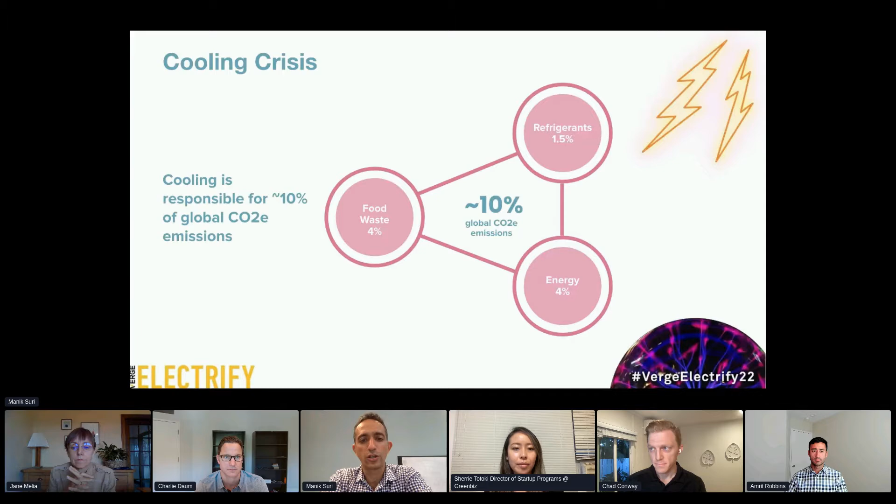We see a huge cooling crisis. Right now, refrigeration and air conditioning, the cooling sector, are responsible for nearly 10% of all warming when you think about the impact that refrigerant leaks, energy consumption, and product spoilage at scale have on the ecosystem. There's just a massive amount of warming caused by this sector. It's kind of hard to fathom that nearly 10% of warming comes from cooling.

There's a lot of economic waste as well. On an annualized basis, you've got billions of dollars that are wasted on inefficient and poorly optimized assets that are just burning energy and using electricity in ways they don't need to. Tens of billions are lost in product spoilage, and huge amounts are spent on asset maintenance and replacement when they don't need to be, because these assets currently don't have good data coming off of them and are not being optimized or managed intelligently.

We think that the cold chain, the refrigeration piece of cooling, is large, dumb, and growing, and a real interesting area to focus on as part of the energy transition and as part of building climate technologies. There are trillions of dollars of assets, food, pharma, and data that flow through the cold chain, 3 of the most important assets in the global economy. There are 90 million stationary fridges and freezers in the business world, so commercial refrigeration, not including the 1.4 billion residential. And most of that inventory, most of those pieces of equipment are dumb.

They're not connected to the cloud, they're not optimized with data science. And this sector is growing at 8% CAGR globally and 15% CAGR in the developing world, because a lot of the world doesn't have adequate refrigeration today. So this is already an existing large infrastructure layer that's growing rapidly and dumb.

We're trying to build clean cooling as a multi-phase journey. We're starting by monitoring - as the saying goes, you can't manage what you can't measure. Once we can monitor, we can start controlling these pieces of equipment, and then ultimately, by monitoring and controlling, we can start to optimize them.

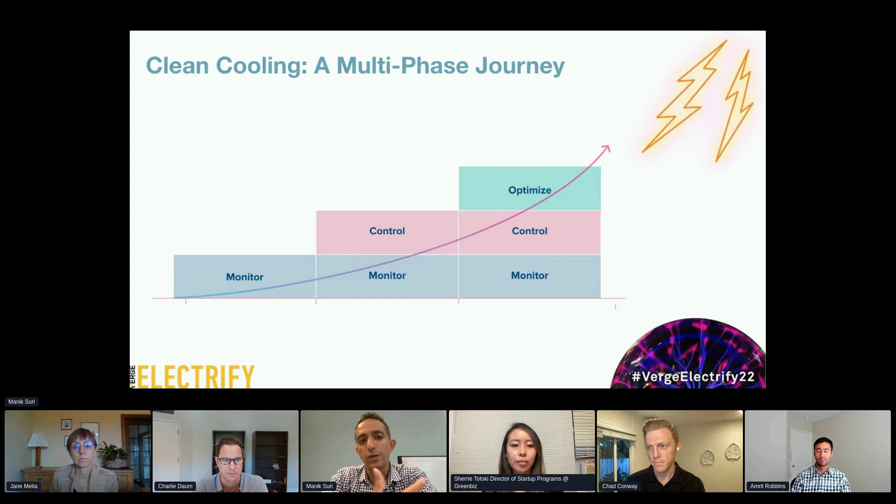We sometimes describe this as a Nest model, similar to what Nest has done on the residential HVAC side, but for commercial refrigeration. So the first thing we built at Therma was the best-in-class monitoring solution. We used a new type of IoT connectivity layer to create a sensor product that uses long-range radio to get signal out of the inside of refrigeration reliably.

This was hard to do with Wi-Fi and Bluetooth, so most companies didn't deploy wireless sensors. We've been able to use LoRa, long-range radio, to get signal out reliably and with low battery consumption. We're also offering this product as a do-it-yourself, drop-in-place installation. No technicians, no hardware required, no hardware costs or implementation. It's a pure drop-in-place sensor.

And the business model as a result is highly scalable. It's a SaaS offering, sold on a subscription basis. Over the last two years, we've gone from 100 sensors to over 10,000, from a couple of customers to over 1,000. We're doing 15% month-over-month growth, and we've signed up some great logos, operators of brands like McDonald's, Pizza Hut, Domino's, Taco Bell, up the supply chain, distributors like Now Foods, UNFI, Kreider, and large cold storage warehouse players like Lineage and US Cold.

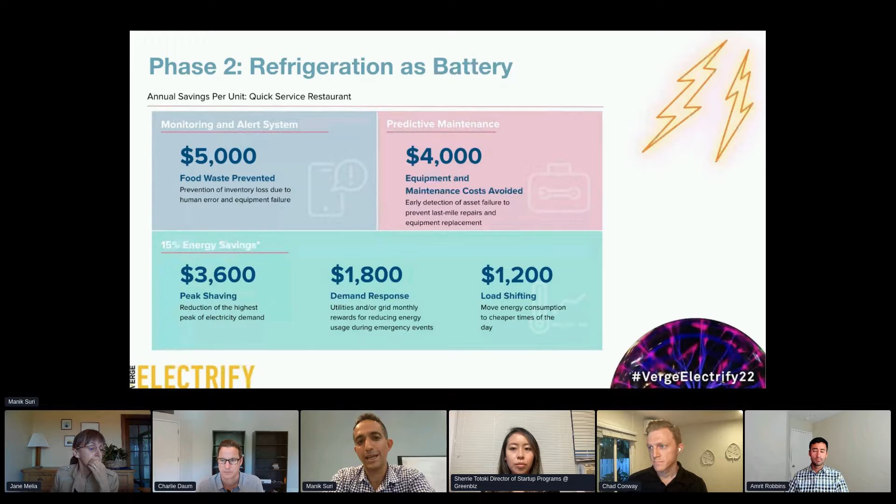The second phase of the intelligent refrigeration and clean cooling play is to turn refrigeration into a battery. Over the last year, we've started not just monitoring, but actually controlling refrigeration, creating savings for the customer that are not just around reducing spoilage and asset downtime, but actually lowering the energy footprint. Using a combination of peak shaving, load shifting, and demand response, we can create value by essentially tapping the refrigerator as a battery, taking advantage of the fact that you can move when and how power is consumed on that asset to reduce load and save money.

There's multiple methodologies at work. Shifting, shaving, and demand response each have value associated with them. Essentially, you can imagine turning refrigeration up and down dynamically, using it when energy is cheaper and cleaner, lowering utilization when peak demand hits, and when the utility needs that power for other purposes, we can lower consumption.

This allows us to expand our revenue and charge more per location. We're 6x increasing our revenue this year per customer, going from monitoring to managing their refrigeration. Ultimately, we see this as a stepping stone to controlling other assets and creating a larger footprint by enabling both asset efficiency, turning these pieces of equipment into more efficient assets, and also adding potentially storage, local batteries.

You can imagine if you had battery power, you could do shaving and shifting for longer and create even more savings on these assets. Refrigeration, it turns out, is a great battery. It's one of those few assets in a location that can actually be turned off for short bursts of time without affecting product. The goal here is to build virtual power.

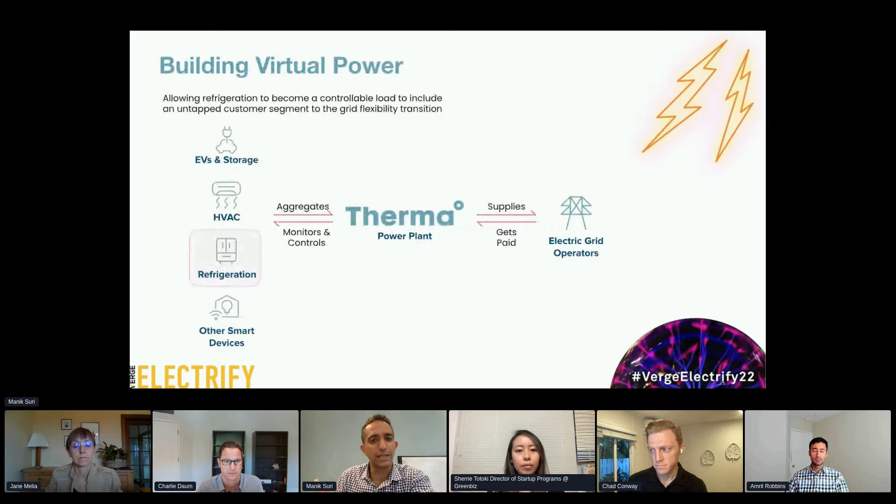We're trying to enable clean cooling at scale and ultimately be part of the energy transition as a virtual power plant. There's a huge market opportunity. In the US alone, we're talking about a multi-billion-dollar annual sales opportunity. There's a lot of refrigeration—it's literally everywhere, and most of it is underserved.

When we think about sectors, today we're focused on commercial, which is essentially small box refrigeration in your typical restaurant, school, university, hospital, pharmacy. But of course, there's huge opportunities in supermarkets, grocery, and cold storage as well. We think that we're just getting started.

We're about 60 people on our team based out of the Bay Area. I live in San Francisco, so I'm living through the energy transition and the climate crisis firsthand, having grown up in California and seeing this. I think our team is mission driven and believes that we can do good and do well, marrying profitability and sustainability.

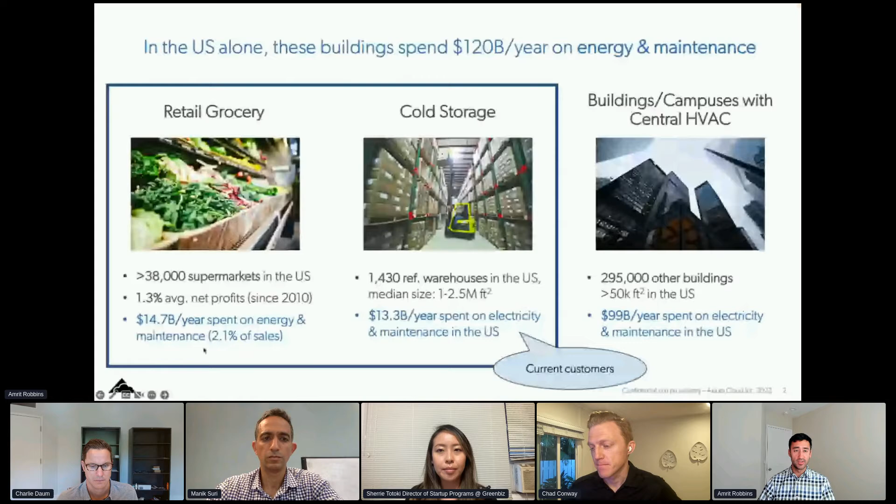What's important to note is that for retail grocery specifically, which is most of our customers to date, there's about 60,000 retail grocery stores in North America, razor thin profit margins, and these folks spend more on energy and maintenance than they take home every single year in profit. If you dig one layer deeper on the P&L, it turns out that retail grocery spends more money just to power and maintain refrigeration than they take home in profit every month.

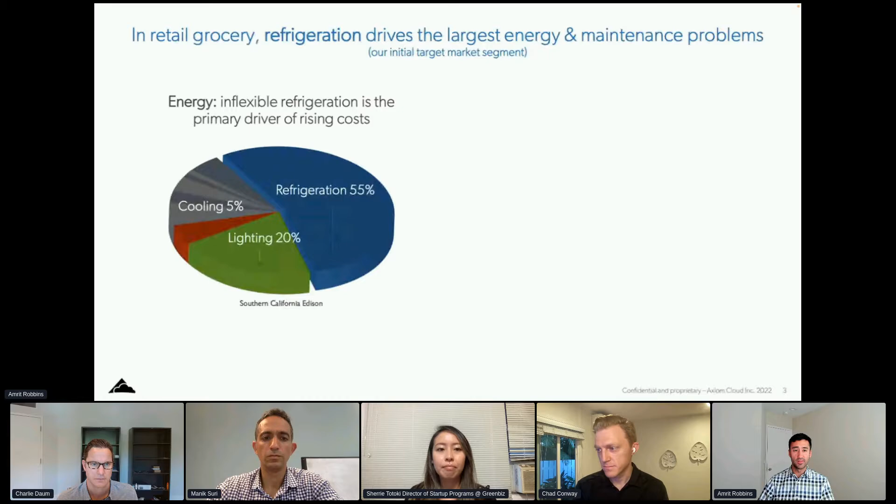And that's because refrigeration is the elephant in the room, consuming over half of the energy and 90% of the service dollars. Refrigeration is responsible for about 90% of service calls. So absolutely enormous P&L impact for retail grocery.

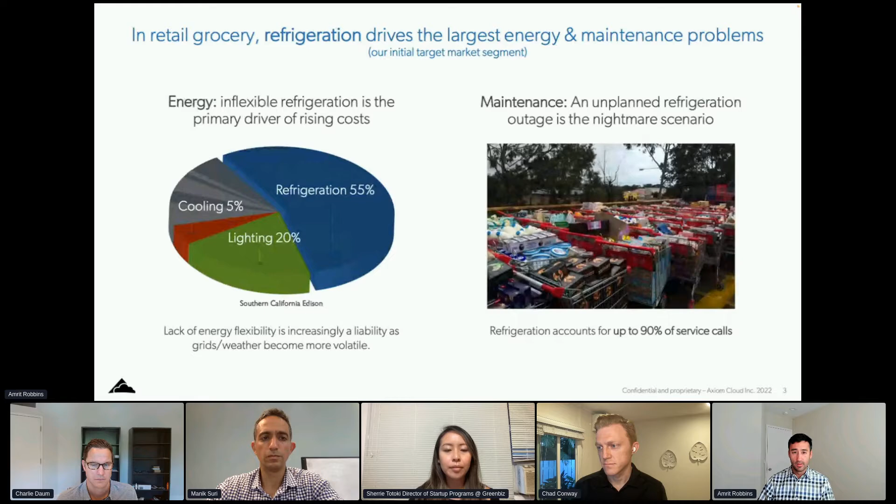Beyond that, you also have to keep in mind that refrigeration is the most mission critical asset in the entire retail grocery business model. There's a lot of really visible impacts when cooling goes out. That's kind of the nightmare scenario, but it also affects every single other element of the entire business model, down to things like food spoilage and shrinkage, employee satisfaction and turnover, customer loyalty, cart size, number of visits per month. All those things start to trend in the wrong direction when you have recurring cooling outages.

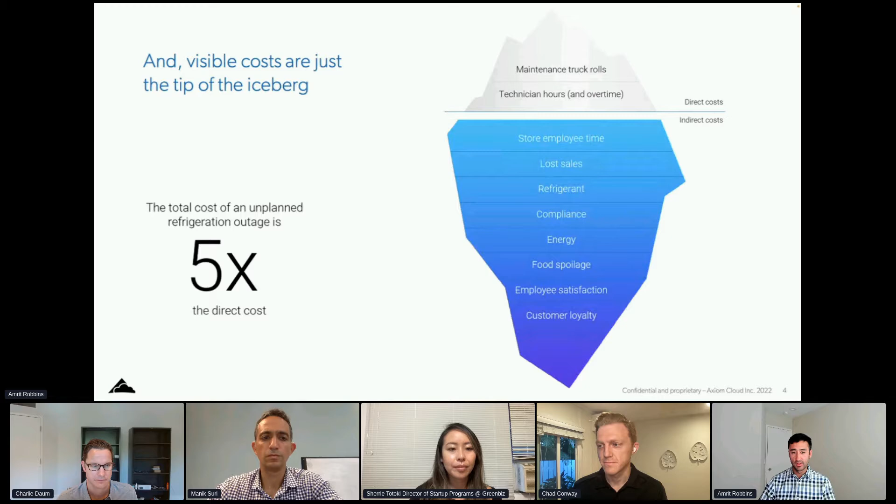It's not fun if you show up at the grocery store and there's yellow caution tape in the freezer aisle. You can't buy half the things you want to buy. So despite all this, the massive P&L impact and the fact that this is the most mission critical business asset in the entire grocery business model, our customers today don't have the tools to address the root cause of the energy or maintenance challenges that this asset class refrigeration faces.

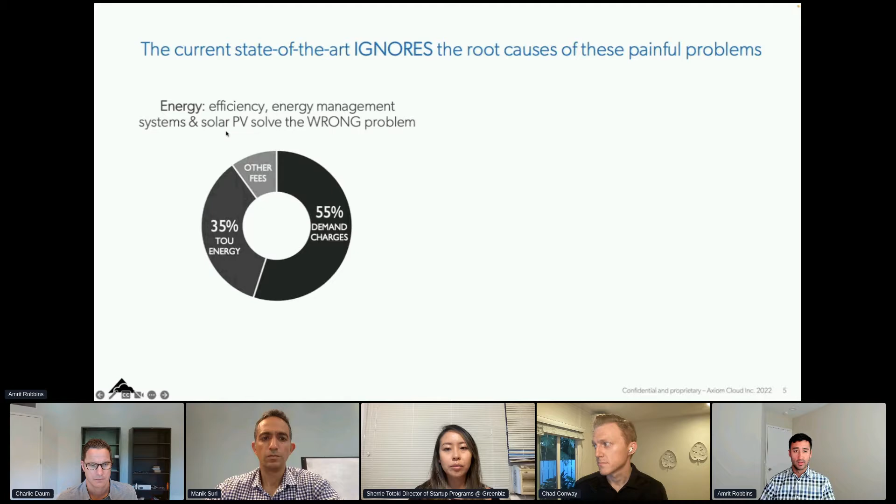On the energy side, our customers are spending a lot of time and money on efficient lighting, energy management systems, rooftop solar, et cetera. All that stuff is great because it reduces the quantity of energy consumed. But unfortunately for our customers, 70% of their bill is not driven by quantity, it's driven by timing of when energy is being consumed. And this is really bad news for retail grocery because they're one of the least flexible energy consumers on the entire grid. Again, because of refrigeration, it just chugs along 24/7.

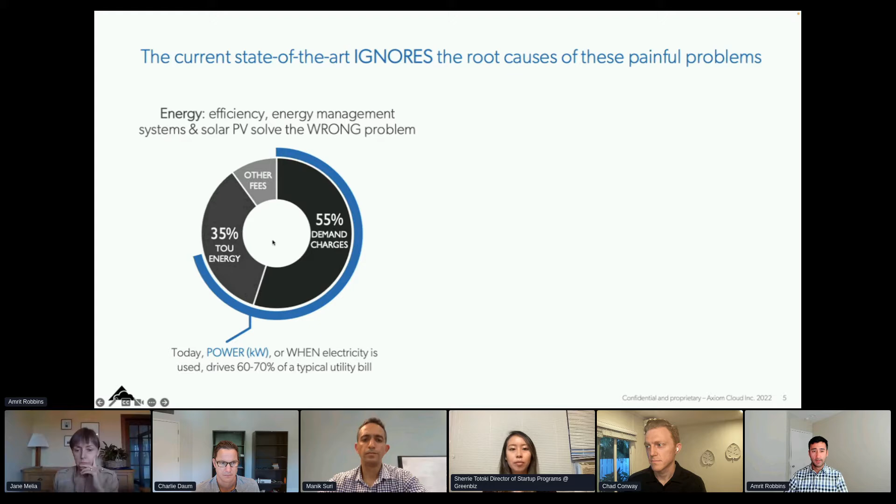And then on the maintenance side, the status quo is even worse honestly. It's a completely reactive break-fix mentality. It's not data-driven at all. Basically you cross your fingers and you hope for the best. And when things inevitably break down, it's not one display case in a grocery store because these are central systems. It's a third or it's a half or it's the entire store that's going down all in one fell swoop. And so at that point, you mop the ice cream off the floor, and then you start calling local contractors and begging them to show up. It's a very, very antiquated and bad model right now.

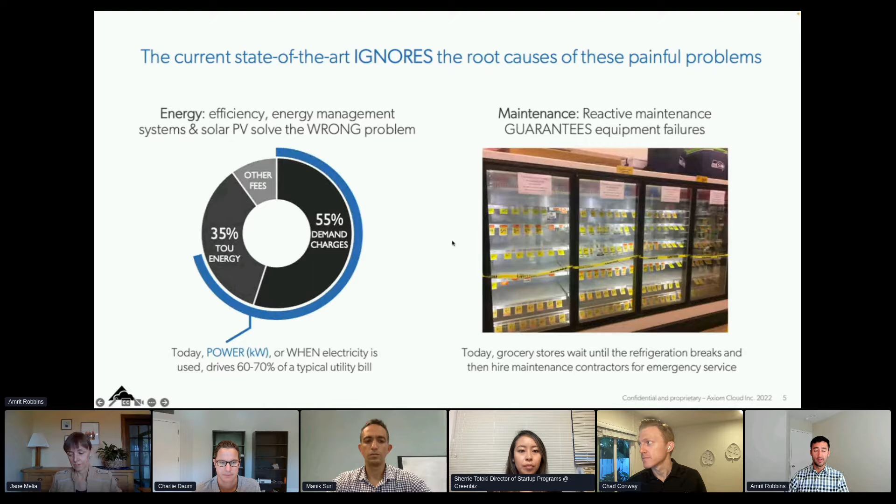So at Axiom, what we're doing is we're taking this playbook, which has already been successfully applied at just about every adjacency, and we're applying it to buildings with large thermal loads for the first time.

That playbook, really simply, step one is get the data out of the machines where it's been locked away for years or decades. In our case, we're connecting to the refrigeration controllers, which are already collecting between 500 and 2,000 live data streams from each grocery store. And for the first time, we're making that data accessible to humans by putting it in the cloud. Historically, the data has been locked away in these controllers. No human ever looks at it. It never leaves the store, and it's overwritten after 3 to 7 days. So step one for us is put it in the cloud across all 500 of your stores.

Step two, transform the data into actionable insights. The problem is actionable insights is a euphemism for a to-do list. And the last thing our customers want to do is purchase a to-do list. And so step three for us is automation: transform the problems into solutions and address the opportunities invisibly behind the scenes using software.

So at Axiom, we go to market with 3 subscription-based apps. The first one is Facilities Analyzer. This is enterprise visibility. The other 2 are premium apps. This is where we layer in the AI and the automation and data analytics.

Virtual Technician is predictive maintenance, basically solve problems before they turn into a big cooling outage using software invisibly behind the scenes. Or if an on-site technician is required, reduce the number of their visits per month, reduce the duration of each visit, and eliminate as much thinking from their job as possible by packaging these things up, batching and triaging, in a way that makes so much sense for technicians. So where's the problem? How do I solve it? What's the data to back this up and show the before and after?

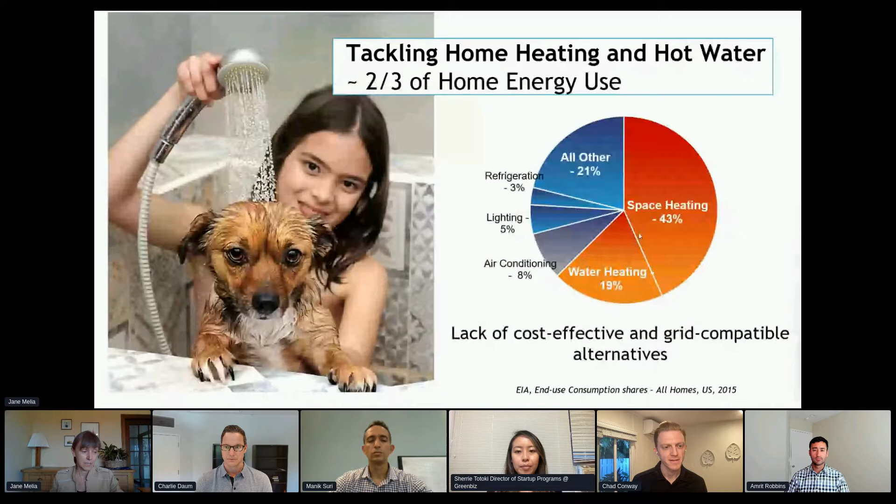So what does Harvest do? We deliver electric heating and hot water for homes, always using the cleanest, cheapest electricity for the lowest bills and lowest emissions. Our device is the Harvest Pod, shown here. It's a smart IoT controller combining electronics and flow controls, and it's the brains of the overall system.

It operates just one heat pump when electricity is clean and cheap. It stores that energy in a thermal battery and delivers it for all the heating and hot water needs of the home, completely decoupling electricity use from delivery of home comfort, just with one heat pump, one tank. It works with forced air, it works with radiant floors, it works for existing homes and for new homes, and it's simple and cost-effective to use and install.

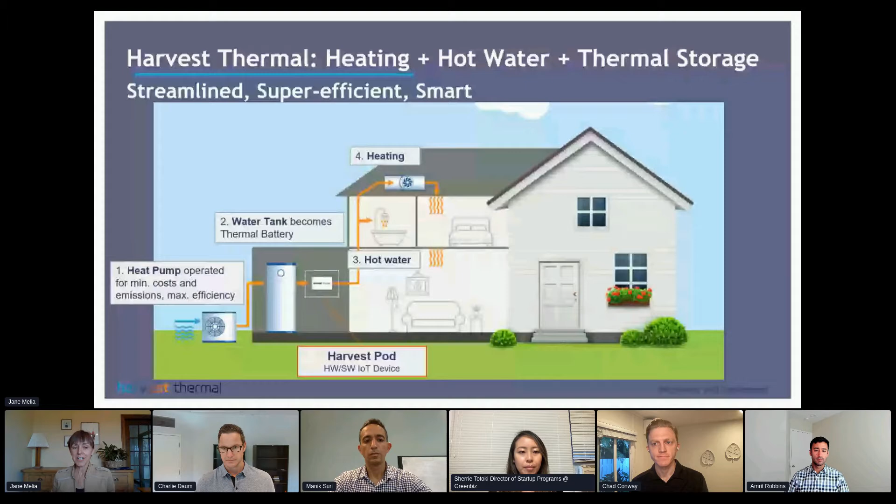You think of a Tesla car sometimes as a computer on wheels. Harvest is really a computer on a tank. The system is smart, integrated, cloud-connected, with machine learning to optimize performance and user experience. It's also demand response capable for VPP integration, which some of the earlier speakers have highlighted as critical. Without the Harvest Pod, heat pumps run on electricity at the worst times in terms of cost, pollution, and grid stability. Let's take a look at how Harvest solves those issues.

Now we need to transition our homes from gas, particularly for heating and hot water, the largest energy loads on the home. But the challenge is that they operate instantaneously to heat the home in the mornings and evenings, so they're not really benefiting from the low emissions and low cost times of day. This makes it a challenge to scale, and it's putting a huge additional load on the grid, up to a 40% increase in peak load in the mornings.

Now, wouldn't it be great if we could sometimes use an inverse duck curve? Well, that's exactly what Harvest does. Just using one heat pump and one tank in our Harvest Pod, we're shifting those two-thirds of the energy use to the middle of the day, from peak to off-peak, for that full heating and hot water load.

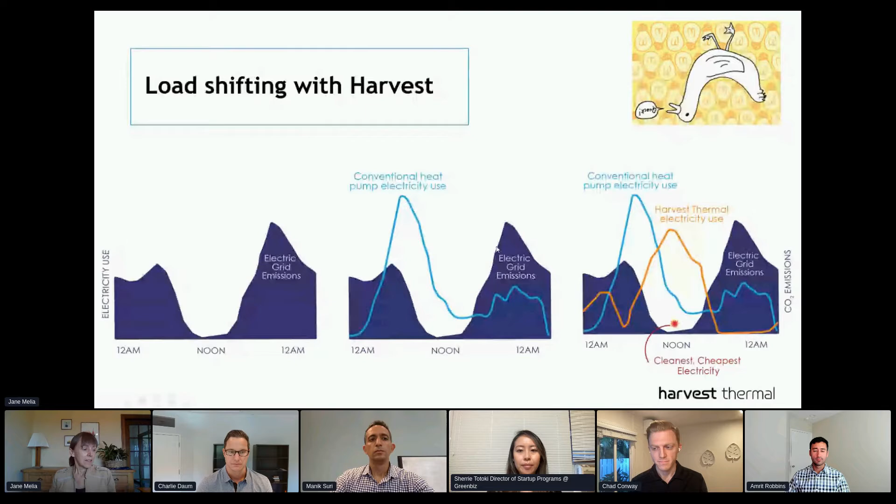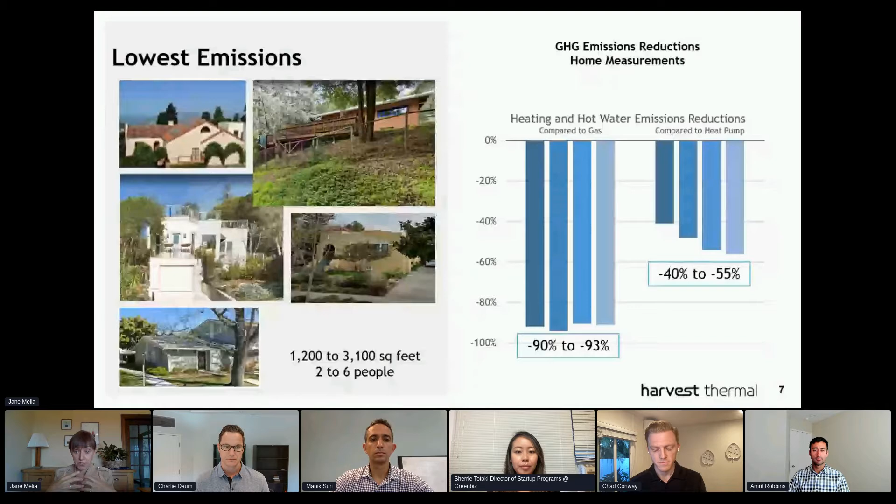So let's look at the results. As I mentioned before, all our homes are now reducing emissions by over 90% compared to gas, and halving emissions compared to the next best alternative, which are those great regular heat pump systems. We do that while slashing bills, and this delivers a positive payback compared to all alternatives, and super comfortable homes. As we like to say at Harvest, Harvest is best for the planet, but also best for your wallet, and best for your home comfort.

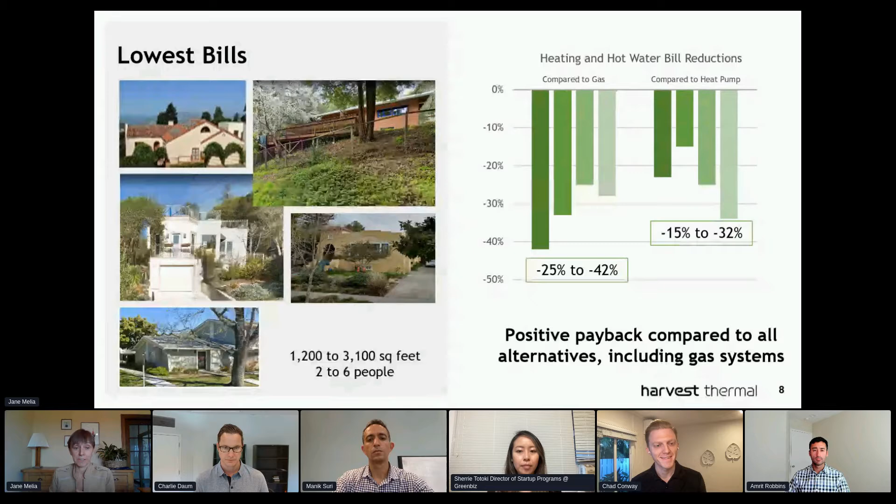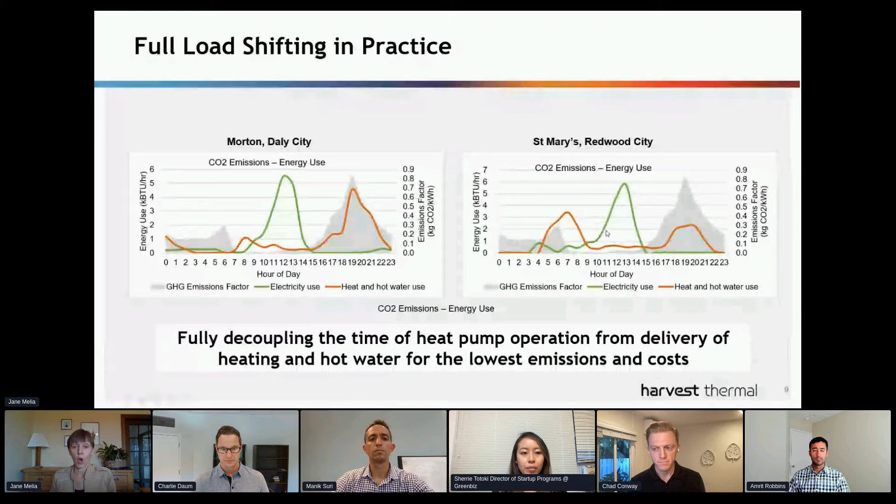Here I wanted to just show load shifting in action in a couple of homes. The green line is showing when Harvest is actually drawing electricity. The orange line shows when the home is using that heating and hot water, completely decoupling the two.

I want to end with some of our homes in action. We currently have about 20 homes deployed in California, and we're expanding up the West Coast later this year. But every single home, as you can see, is reducing emissions by over 90%, and they're reducing bills by between 15 and 42%. And that's it from me.

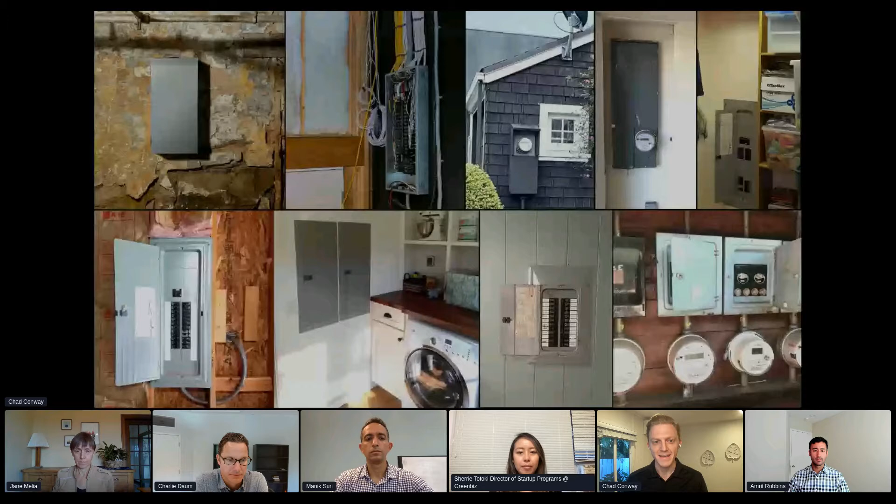I'm Chad, SVP of products from SPAN. Today I'm going to talk to you about a very important piece of technology that is in all of our homes. Generally we only interact with this device when there's something wrong - you turn on the kettle and the toaster, the circuit breaker trips, and you have to run out and switch the circuit back. With electrification, we're going to be running 4 times as much electricity through this lowly box that was designed over 50 years ago.

At the time when electrical panels were designed, there was no concept of having your own generation at home. There were only big power plants located somewhere else, feeding that power single-directionally to your home, to a small number of electrical appliances. With electrification, we're going to be pulling a lot more electricity through this box, and we need to know where that electricity is going and how to manage it so it's not a big tax on the grid.

We recently worked together providing data to Canary Media to show that SPAN can actually manage and optimize the electrical consumption within your home using smart panels. This will greatly reduce the impact on both your home and the grid at large as we electrify, adding heat pumps, electric cars, and induction cooktops to all of our homes.

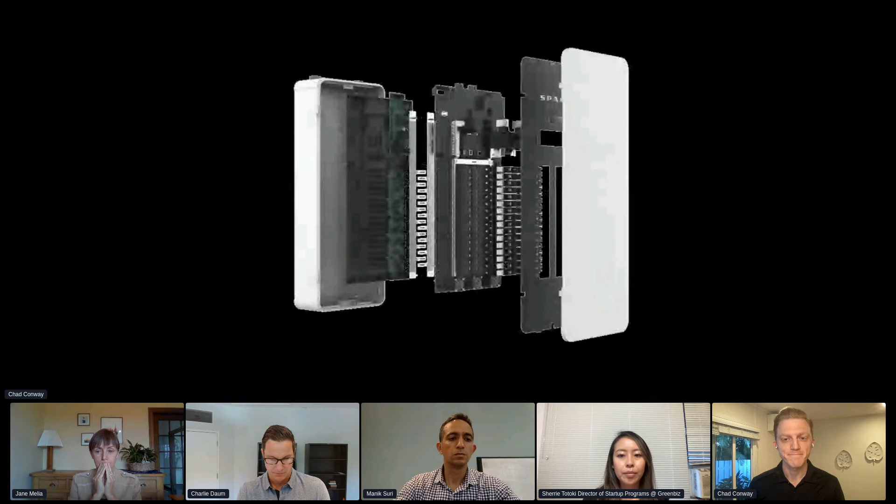This is our panel, the SPAN smart panel. It's got monitoring and control built in all in one device, and it's available to be installed throughout the United States. We are installed in hundreds of homes in every state throughout the country.

We also offer SPAN Drive, which is an EV charger. As I said, with electrification we quadruple the energy consumption, and 50% of that is generally adopting an EV in your home. With EVs, we are seeing a large number of consumers having to upgrade both their utility service and their electrical panel. We are able to reduce the time and cost of installing an EV charger by monitoring and controlling your EV charging to fit within your existing infrastructure.

So what that means is we can charge your car as fast as any of the cars on the market just by monitoring your grid connection and dynamically adjusting the charge power. We can also charge on sunshine, which allows us to change the charge power of the car to match what your solar panels on your roof are producing.

All this is backed up by a really consumer-friendly app. This app provides information about where your energy is coming from, whether it's coming from local solar or battery storage, or even if it's on the grid. We look at the open data about how energy is flowing into your house from the grid and can provide information and insights into how that energy is being produced, whether it's solar, wind, nuclear, or combustion resources.